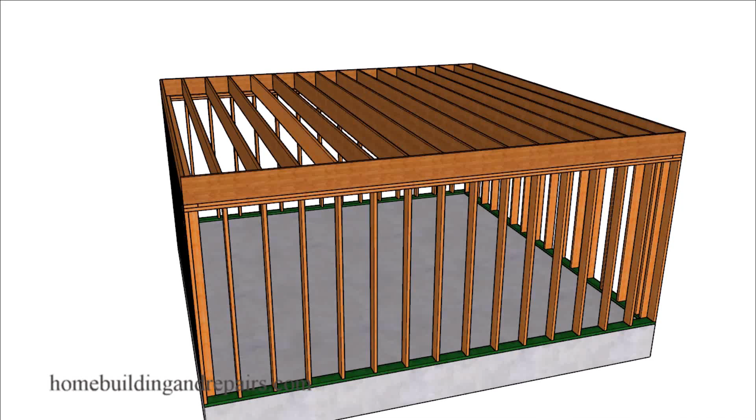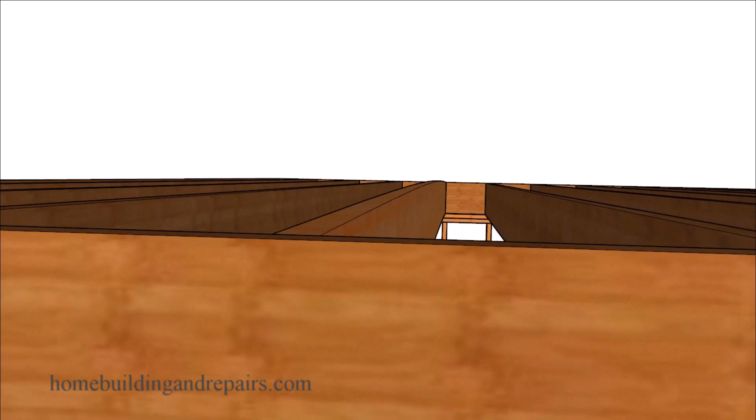In this video, we are going to take a look at a repair method you might be able to use if you have a crowned joist instead of a sagging joist. I have plenty of videos on sagging floors. However, I think this is going to be the first one where I take a look at the exact opposite problem. So here you can see where we have one joist that instead of sagging, it is actually sticking up or crowned. And most of the time, crowned joists will straighten out or kind of flatten in the same way that a straight joist might sag.

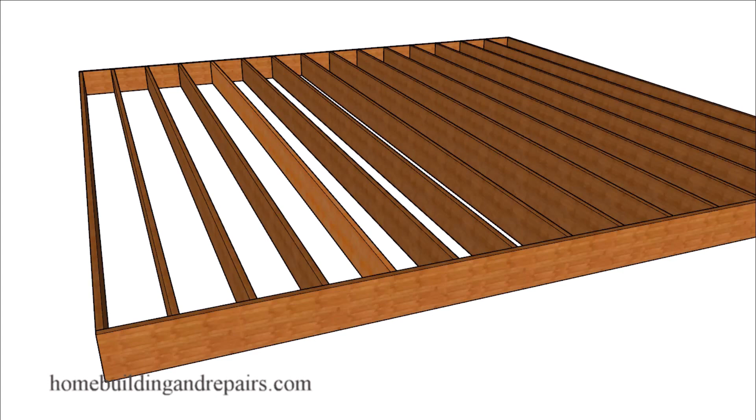Let's go ahead and remove the lower walls for a better viewing opportunity and then install our floor sheathing. Now, the first thing I want to point out is that if you need to cut the sheathing, you could end up reducing the structural strength by staggering the floor sheathing. If you're dealing with plywood or OSB, or if you're dealing with 1x6, you could still be dealing with the same situation.

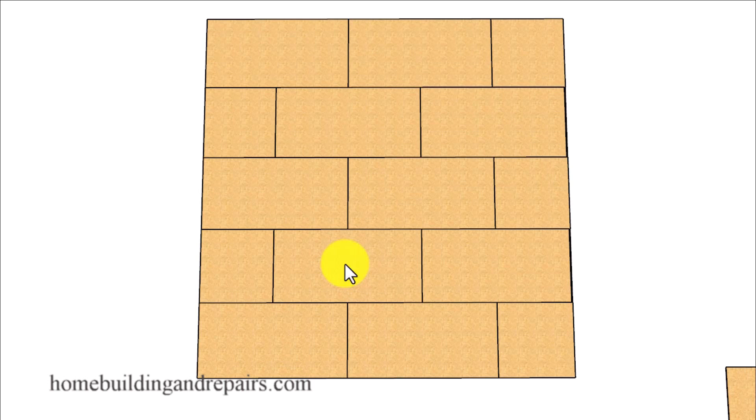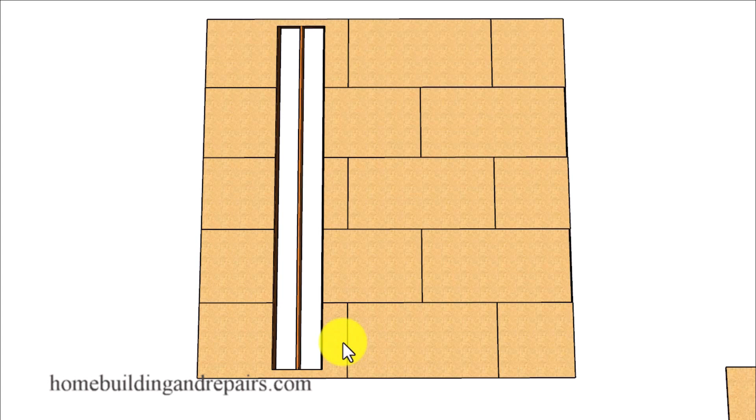Now here's what I'm talking about. Let's say I got one crowned joist and I need to remove the sheathing so that I can use a planer or a saw, something to straighten the joist out. You can see here where something like this could create a problem with the reason why the engineer wants us to lap our floor sheathing. But I'm not going to rule this out if you are going to do something like this and cut it back to the next joist on either side, because this is the only option you have.

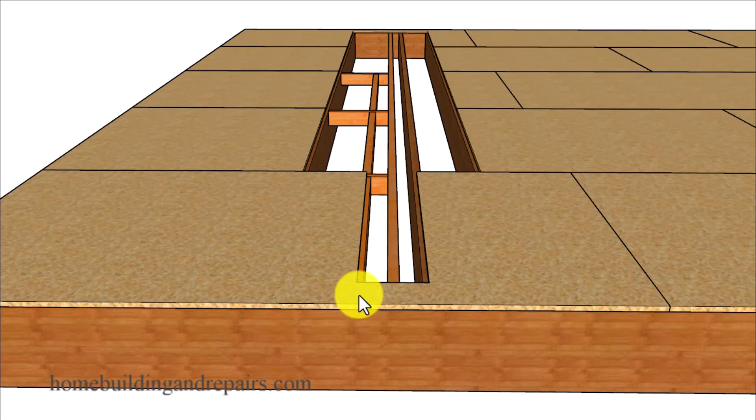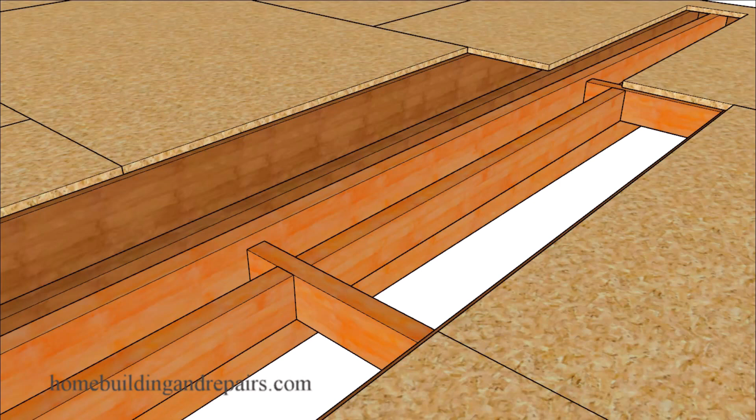I get it. And if you don't have the room or you don't want to cut that much of the floor out, you could always cut a smaller section and then add additional joists or install some type of blocking and structural support system like we have here. I'm just kind of throwing this out there as a method that might work. Remember, I'm not a structural engineer, won't be able to provide you with something that will work for your specific project. These are just suggestions.

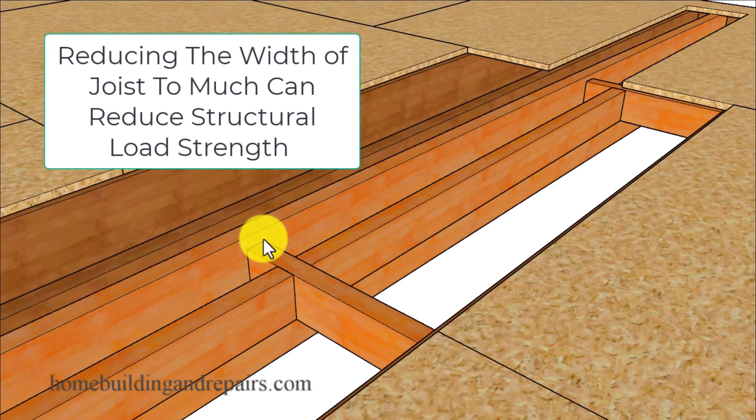So here you can see where if we came across and intersected the crown joist, you can see where the problem is right here. This much of the joist is going to need to be removed to straighten it out. And if you don't remove enough of the floor sheathing, you're not going to be able to run a circular saw through here. However, you might be able to use a planer. And of course, I'm not talking about a hand plane. You're probably going to want to grab an electric plane for something like this.

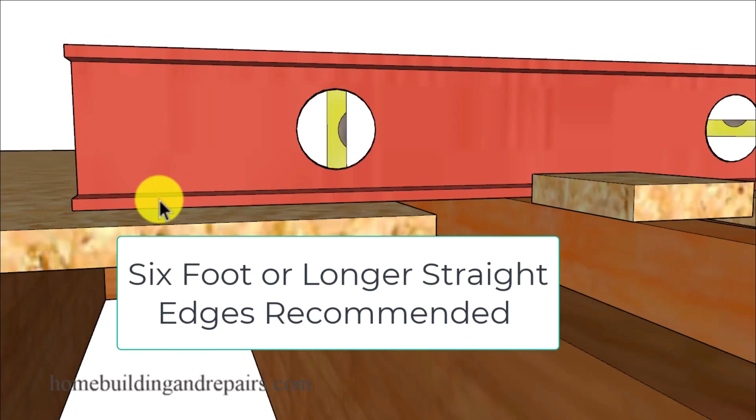And to figure out just exactly how much of the joist we need to remove, we could always use a straight edge. Place the straight edge on top of the existing floor sheathing, and then grab a scrap piece of floor sheathing or a board that would be the same thickness, or you could even use your measuring tape to figure out exactly how much of the joist needs to be cut.

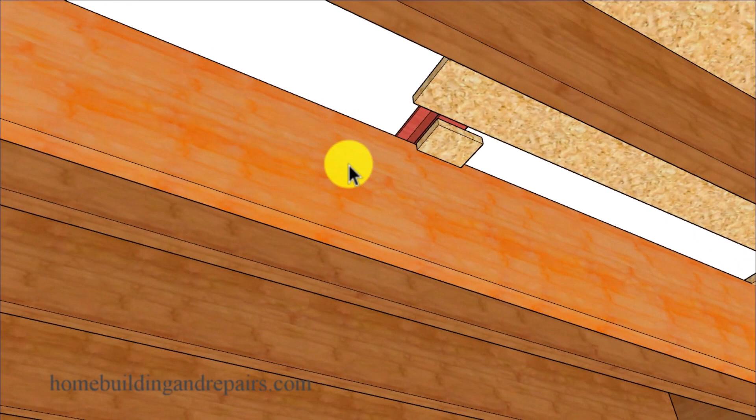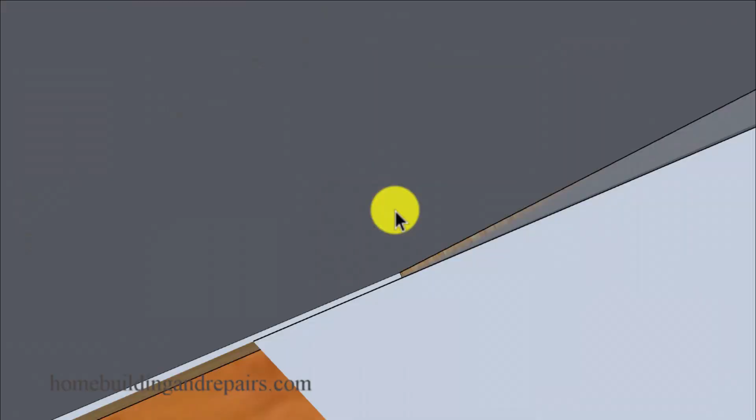Another thing you could do would be to place the scrap piece underneath the level. Then you can mark it. Again, you can always use your measuring tape for this. Put a pencil mark on the joist. With the pencil mark on the joist, you can simply move it back a little bit and mark it again, and keep repositioning it to mark what needs to be cut.

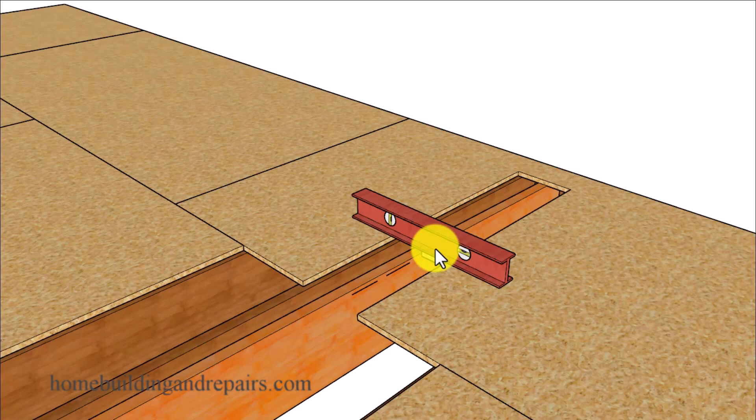I wouldn't suggest marking one end of the joist and then going over and marking the other end, and then grabbing a chalk line and snapping a straight line. If you do that, make sure that you check it in other spots, because sometimes the floor is going to be sagging or it won't be perfectly straight, and this could create a problem for you. So at least use this method to double check any other method that you are going to use. This method might not be effective if you have multiple floor imperfections, crown joists, sagging joists, stuff like that.

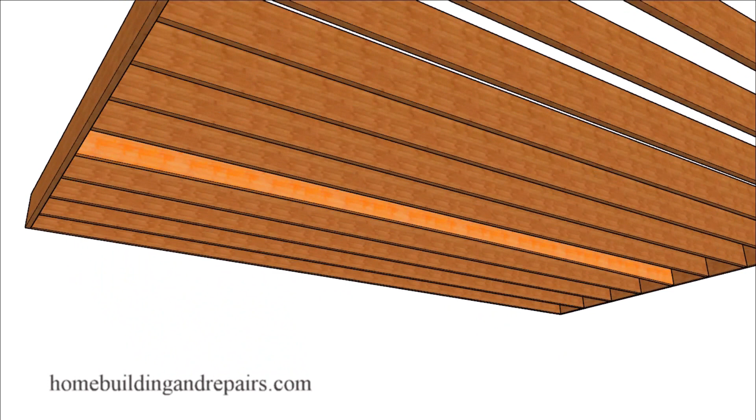In the next example, we are not going to cut the floor sheathing or the lateral strength that is created from it. However, we will be cutting the floor joist. And of course, I will not be able to provide you with the amount of cuts you are going to need. That's going to depend upon the damage of the joist, how much of a crown it has in it. However, we are going to cut one in the center, one between the center and the edge, and of course this one here, so that we'll have 4 equal sections of the joist that are being cut.

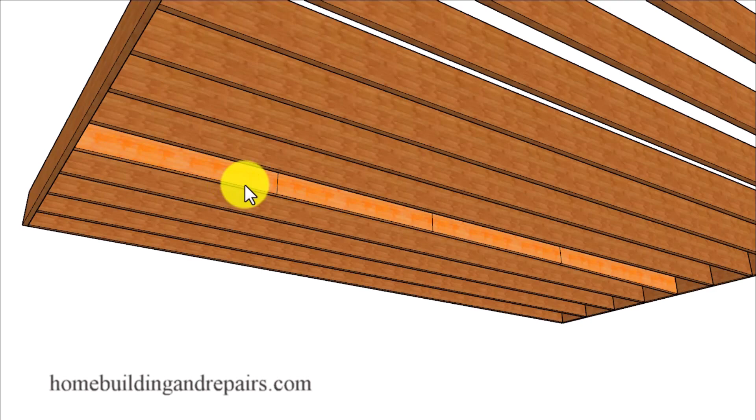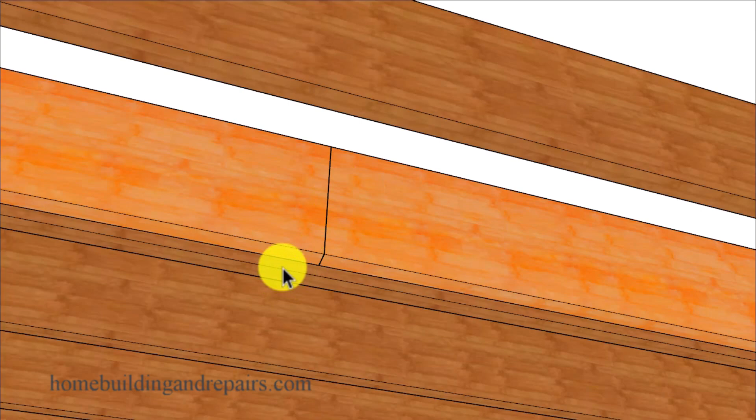And of course, something like this could be difficult if you're dealing with a crawl space. It's going to be a lot easier if you're working in a basement. After you have cut the existing joist, you can install a new joist next to it. You will not be nailing into or bolting any of this together until it's straightened. You might be able to drive a few nails in or screws at the end and even place some blocks in between the existing joist and the new joist.

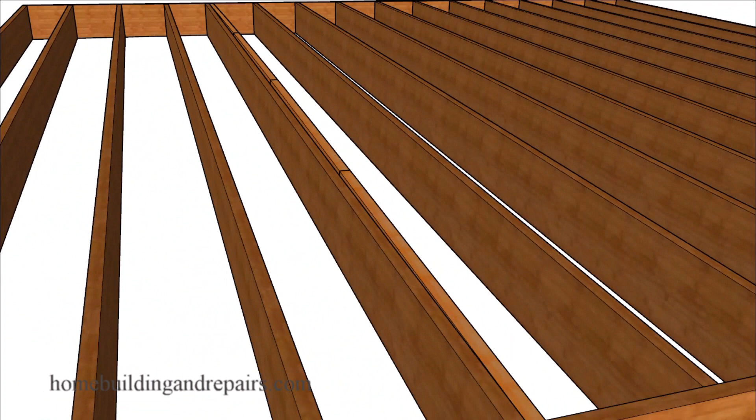Just make sure that you don't nail it to the existing joist until you've pulled it down into the proper position. And that might look something like this. Now, I want to point out that since the new joist is straight and the existing joist is curved, you might need to pull it down a little bit further to prevent something like this.

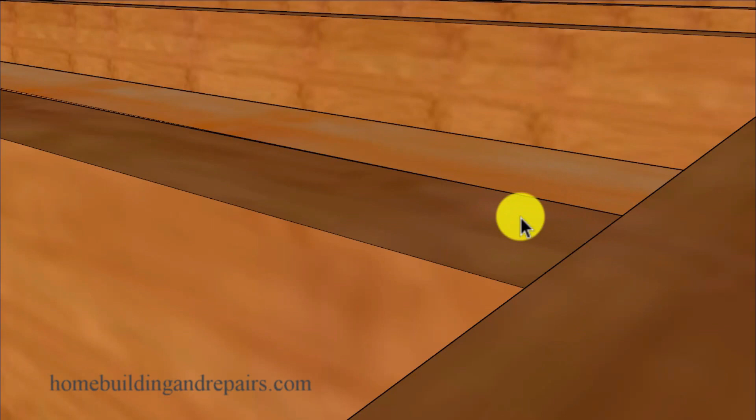So if we go to the other end, it's going to line up. The bottom's probably going to line up with the bottom, unless the lumber sizes are different. Keep in mind that the existing lumber could have shrunk and the new lumber might be 1/4 inch or even 1/2 inch wider than the existing lumber. If that's the case, you won't be working from the bottom of the joist. You'll be working from the top or underneath the sheathing.

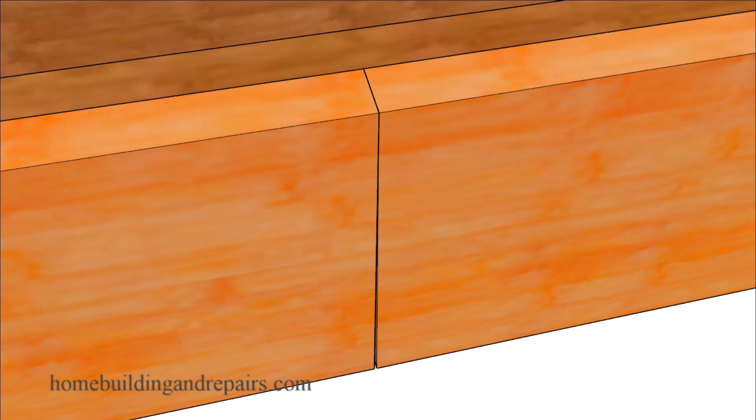Another thing to be aware of: when you reposition the joist, you should have a gap at the bottom, not at the top, because you're going to be pulling this board down. So you could have a slight gap at the bottom, and sometimes these boards will bind from the pressure, so be aware you might need to make these gaps a little wider.

And I'm not about to suggest you can't remove these pieces, just as long as you're going to be able to attach the sheathing to the new joist.

If you're going to make this repair without removing any of the flooring inside the house, then you won't be able to remove the existing joist because you're going to be relying on the nailing from the existing floor sheathing into the existing joist to attach that joist to the new joist to create a transfer. So keep that in mind as another repair option also.

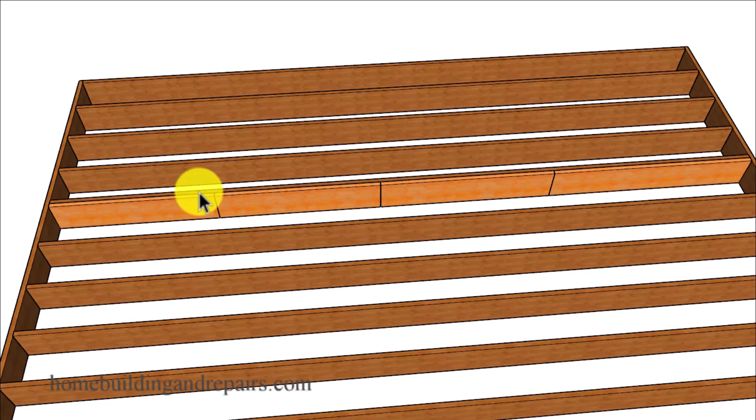If you're having a difficult time, you could simply cut the joist out and replace it as another option. Just make sure that you re-nail the existing floor sheathing to the new joist. Otherwise, you're going to end up with some floor squeaks.

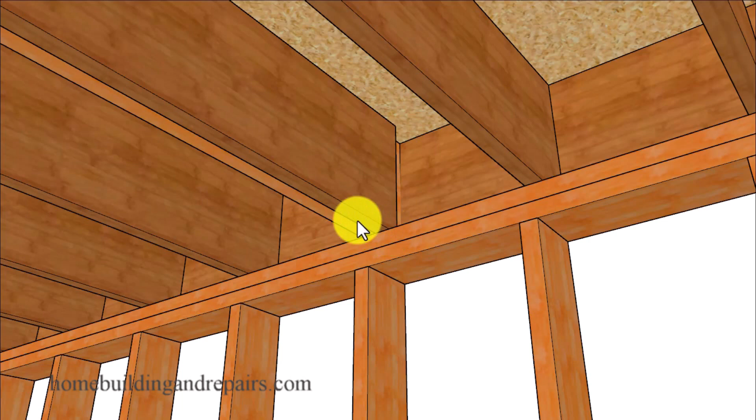Next up, let's go ahead and install our sheathing, remove a couple of walls so that we can get a better look at one of the biggest problems you're going to run into when trying to install your new floor joist. And that's the fact that you might not be able to install a full-length joist. If it does need to be smaller, remember the minimum distance required by most building codes for a joist to be sitting on top of a wall will be 1.5 inches.

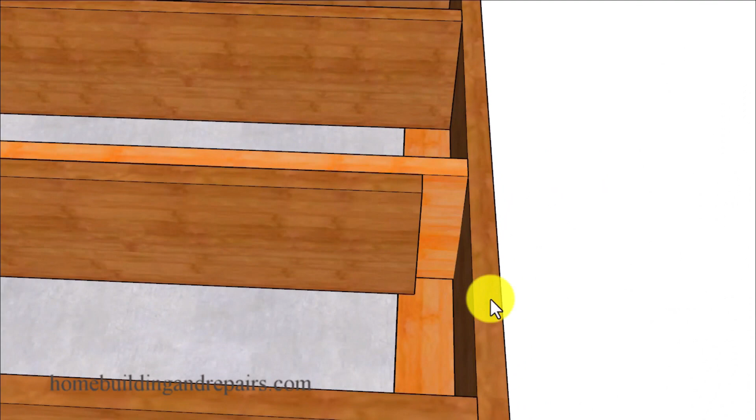So again, if you need to make the joist a little smaller on each end, then maybe slide this section in first and then slide the joist over on top of the wall or the beam on the other side. And remember, you're not going to have a sag. A sagging floor is going to create a problem for this method. However, a crowned floor joist should allow you plenty of room to reposition the new joist that's going to be straight.

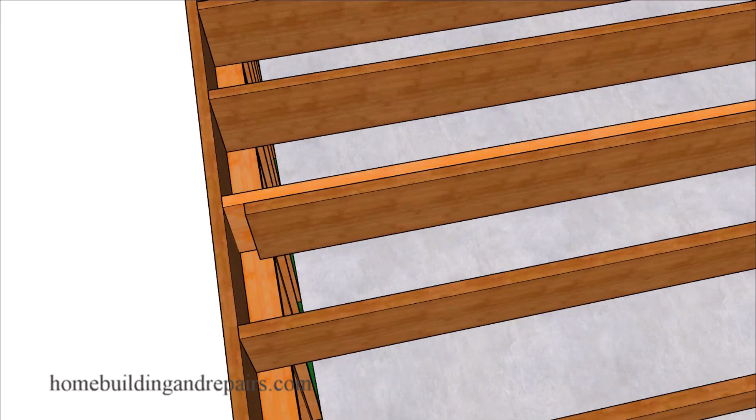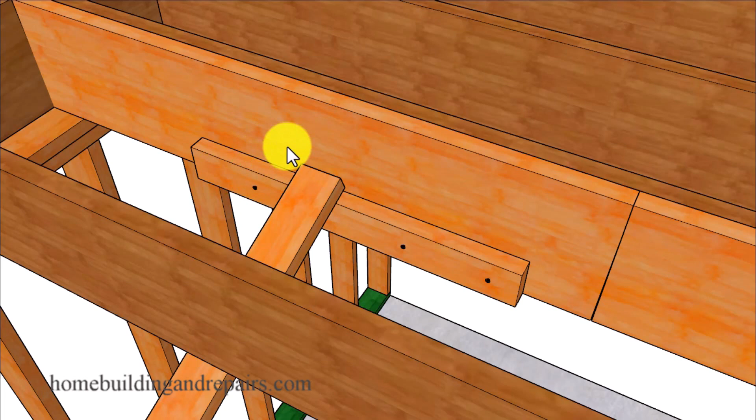Even though I don't think it's going to be that big of a problem to pull the joist down, you could always use a lever type of system, maybe attach a board to the joist with some screws. Just make sure that your screws do not go into the existing joist. Otherwise, you're not going to be able to move the joist very easily.

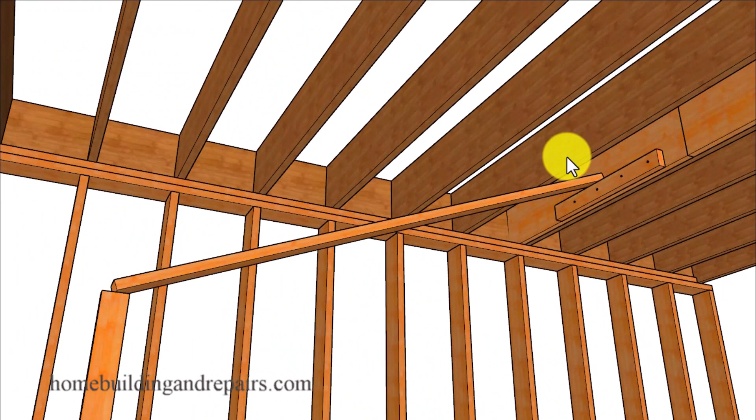And if you're working alone, you can always do something like this. Grab a board and then use another board, something like this, once you get it into the position you need it to, so that you can firmly attach the new joist to the existing one.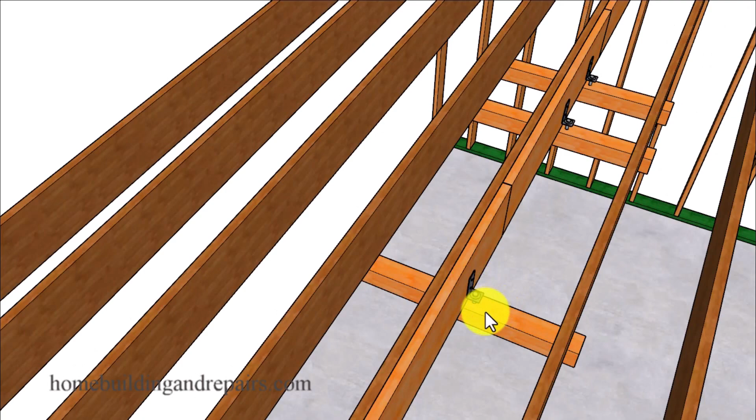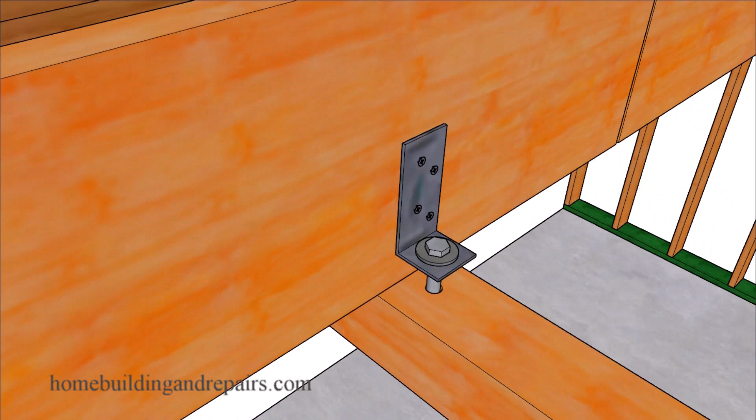And another method might be to use something like this. Grab a scrap piece of hardware, or even make your own hardware. Drill a hole through maybe a 4x4. Again, if you're going to be using some screws, make sure that they do not go into the new joist. With this system here, it shouldn't be difficult to just simply run a bolt through here, go down to the other side, and start tightening the bolt up until you get it into the right position.

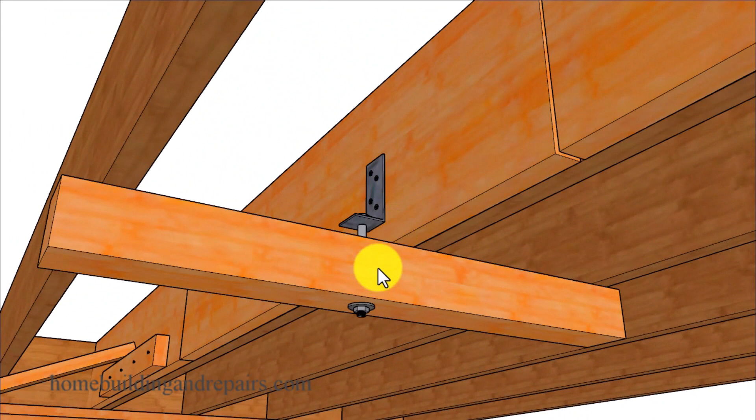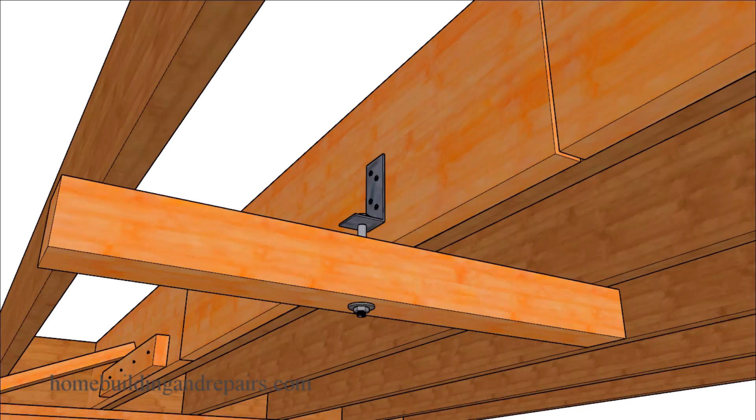Now, another thing you might need to do will be to place a 3/4 inch spacer on top of the 4x4 at both ends, so that this board will be a little bit lower if you need to pull the existing joist a little bit lower. And if one isn't working, you might need to use 2 or even 3 to bring the floor sheathing down and remove the crown in your floor.